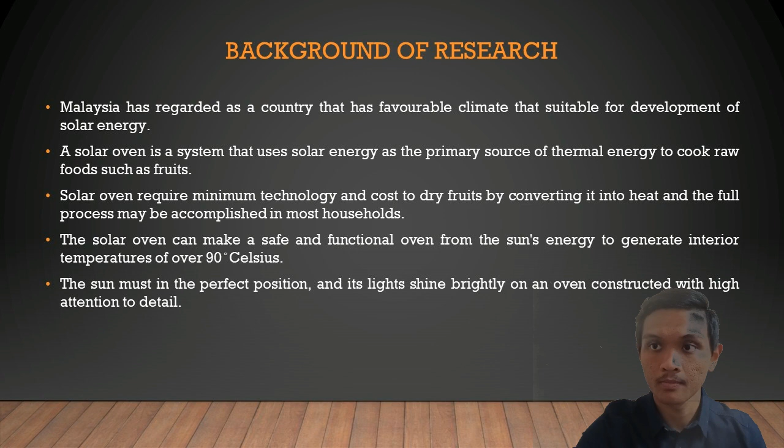This can prevent the problem, and it may also improve the position of farmers today by replacing coal, other fuels, and electricity with solar energy.

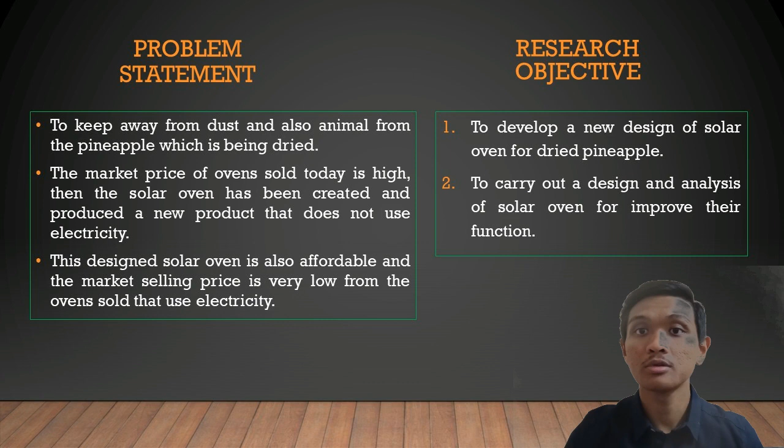The objectives: first, to develop a new design of solar oven for dried pineapple. Second, to carry out a design and analysis of the solar oven to improve its function.

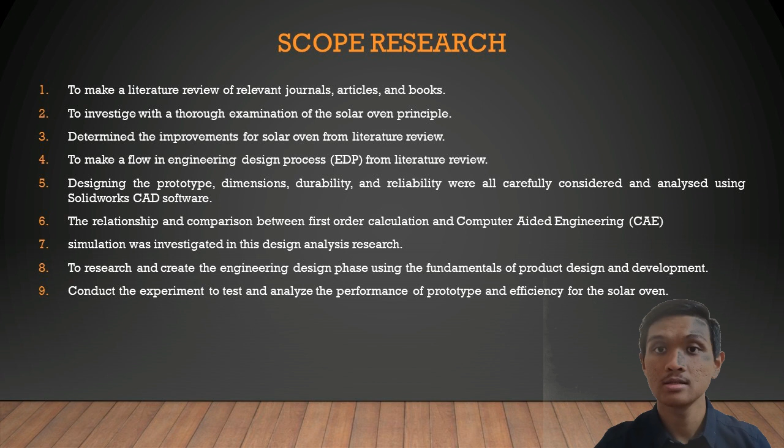To research and create the engineering design phase using the fundamentals of product design and development, and lastly, conduct the experiment to test and analyze the performance of the prototype and efficiency of the solar oven.

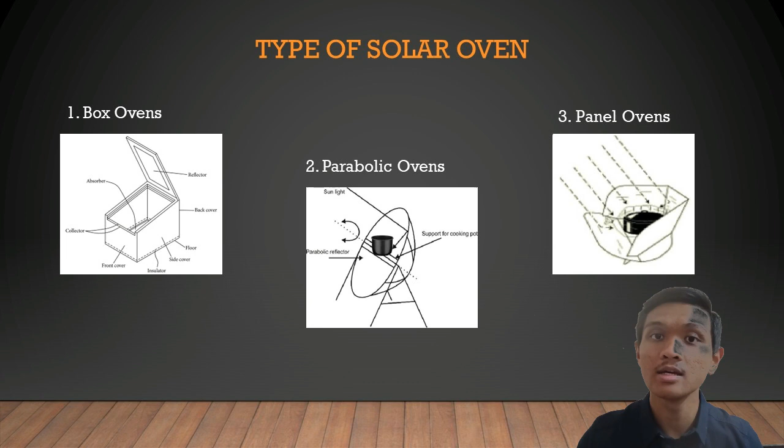According to Tom Grisham 2000, a panel oven is a combination of the box oven and the parabolic oven, using panels to receive the heat and direct it to a separate container where the food is stored inside a pot or other cooking vessel. The inner container is made of glass or plastic and serves to trap the heat inside.

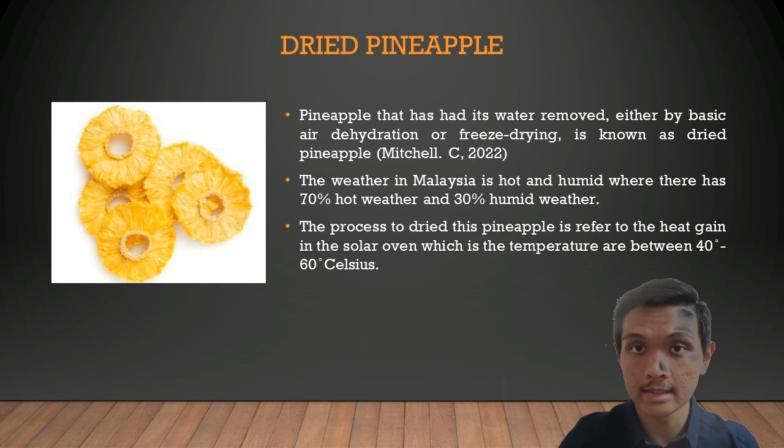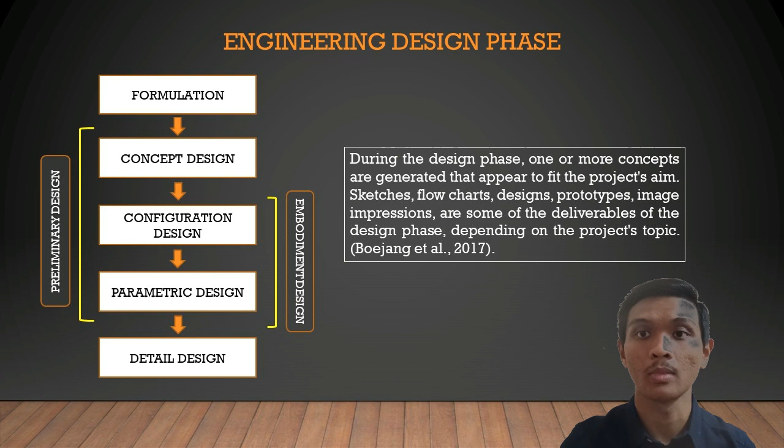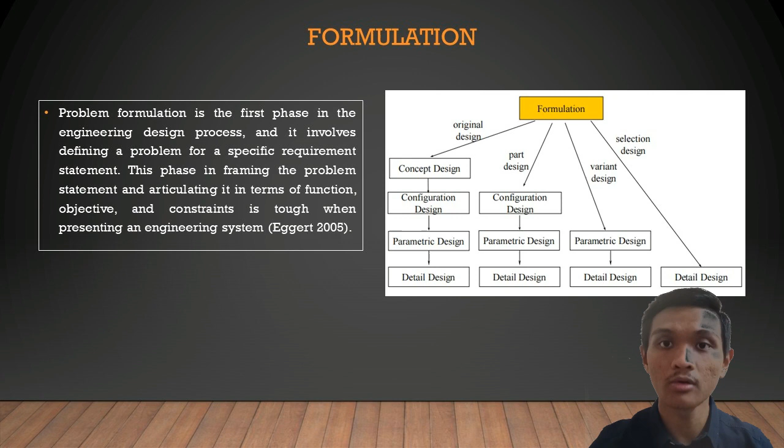Formulation: problem formulation is the first phase in the engineering design process, and it involves defining a problem for a specific requirement statement. This phase forms the problem statement and articulates it in terms of function, objective, and constraints when presenting an engineering system.

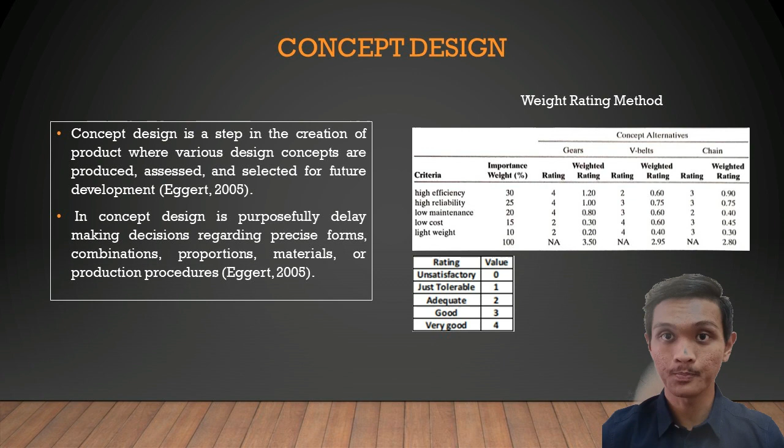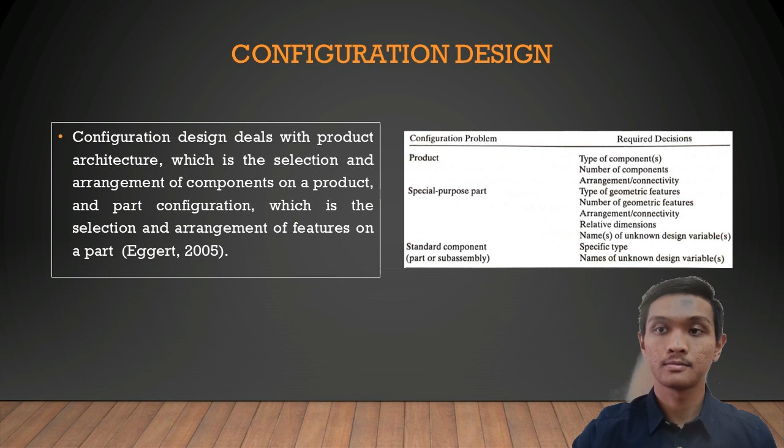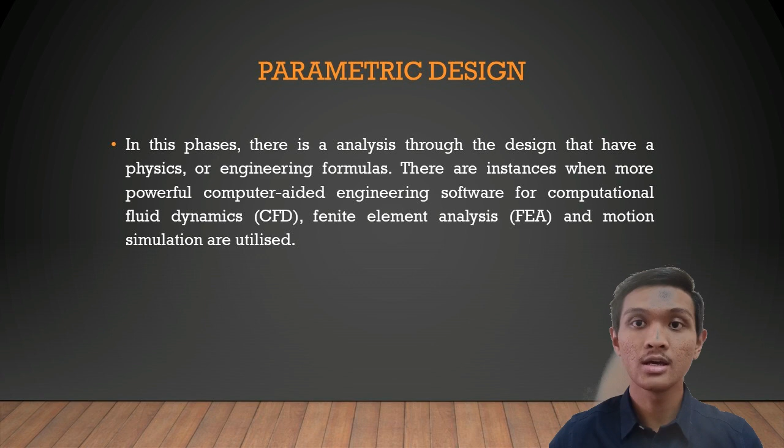Parametric design. In this phase, there is an analysis through the design using physics or engineering formulas. There are instances where more powerful computer-aided engineering software for computational fluid dynamics (CFD), finite element analysis (FEA), and motion simulation are utilized. Lastly, detailed design.

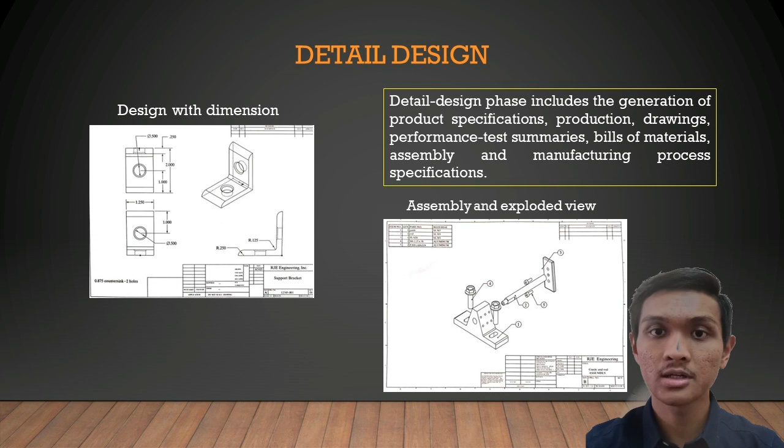Detailed design phase includes the generation of product specifications, production drawings, performance-test summaries, bills of materials, assembly, and manufacturing process specifications. There is an example for detailed design drawing and dimensions, and also assembly and exploded view for detailed design.

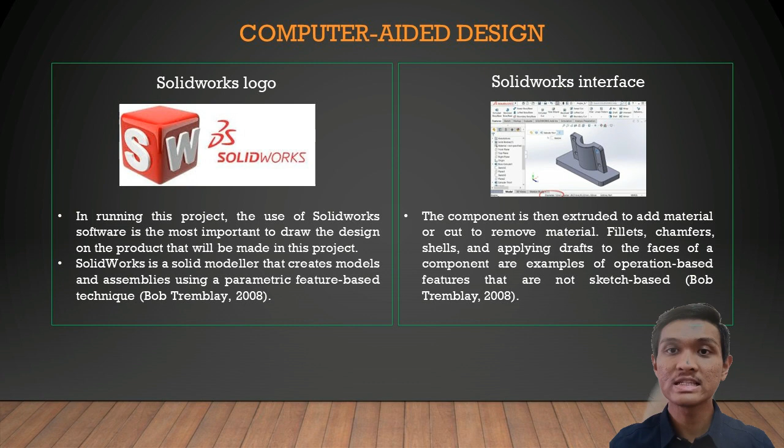Computer-aided design, CAD. In this literature review, there are many types of software that create models and assemblies using parametric features, such as CATIA, AutoCAD, SolidWorks, and others. For this project, I used SolidWorks for designing the detailed drawing. There is an example of the SolidWorks logo and their interface.

Computer-aided engineering, CAE. According to Boejang et al. 2017, simulation analysis types used most frequently in CAE include finite element analysis, computational fluid dynamic analysis, thermal analysis, multi-body dynamic analysis, and optimization. In CAE, there is stress, vibration, thermal and heat transfer analysis, dynamic analysis, internal and external flow analysis, fatigue, fracture, and failure analysis.

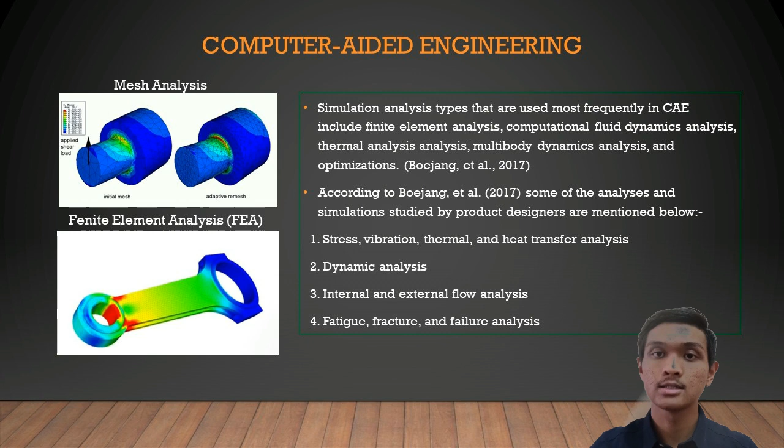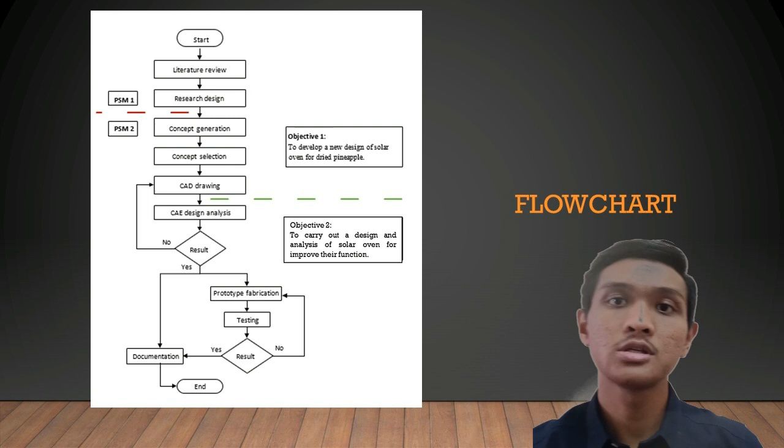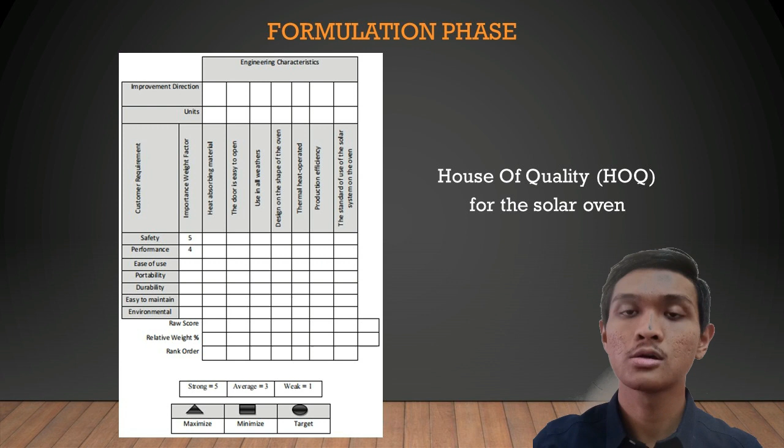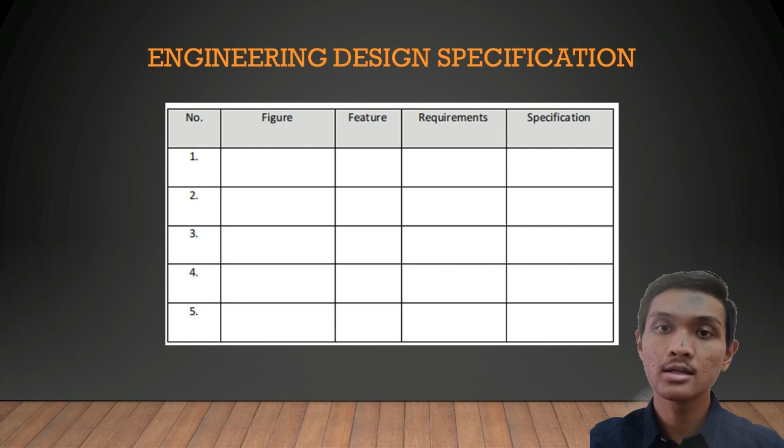Make and buy list. In this formulation and configuration design phase, I constructed a make or buy list to make sure that the detail and total parts for my project can be referred to carefully.

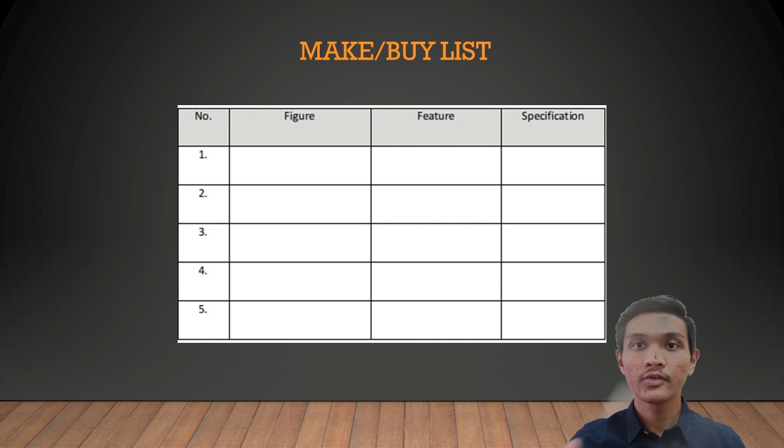Concept generation. The most important phase in the engineering design process is concept generation, generating ideas. My method begins with a list of customer requirements and ends with a selection of product options from which a final design is chosen.

There is a table for combination of concepts, with a total of 27 combinations.

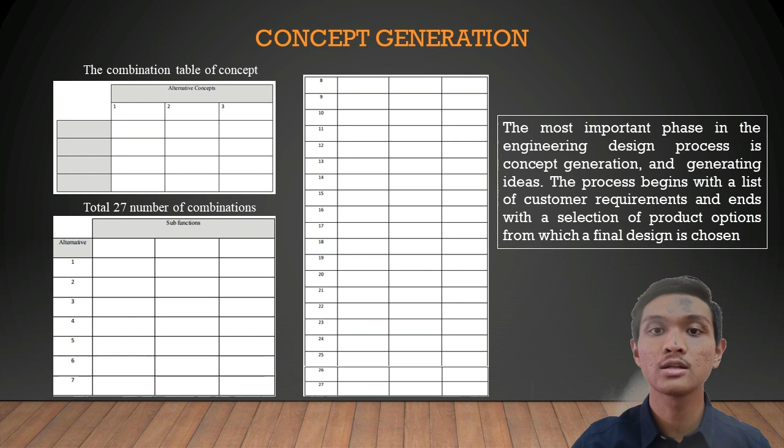Concept selection. In concept selection, I use a weighted rating evaluation method. This method is a prioritized methodology for determining which features and activities to demonstrate on a product overview.

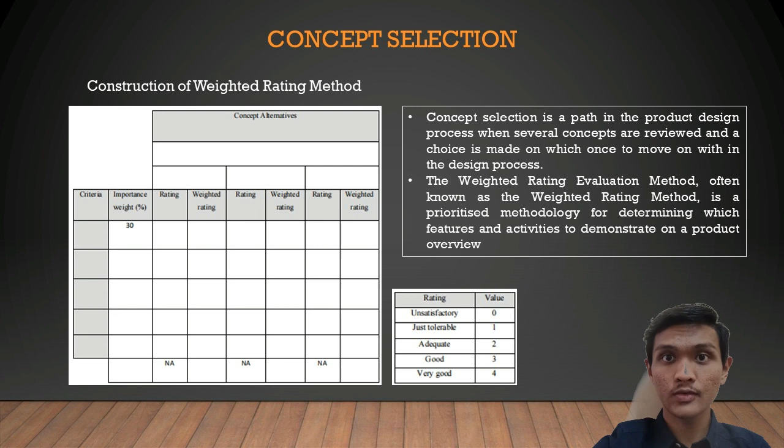SolidWorks software. For the configuration design phase, I use SolidWorks for drawing the detailed design in 3D, starting from part by part until the assembly. There is an example of the SolidWorks logo, the interface, 3D design, exploded view, and also a bill of material.

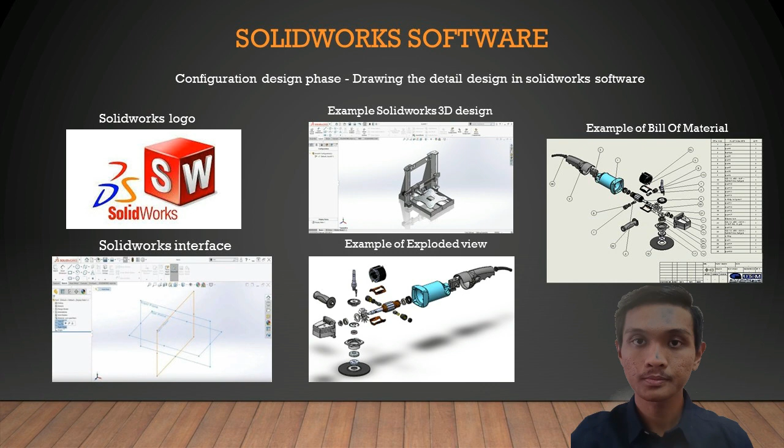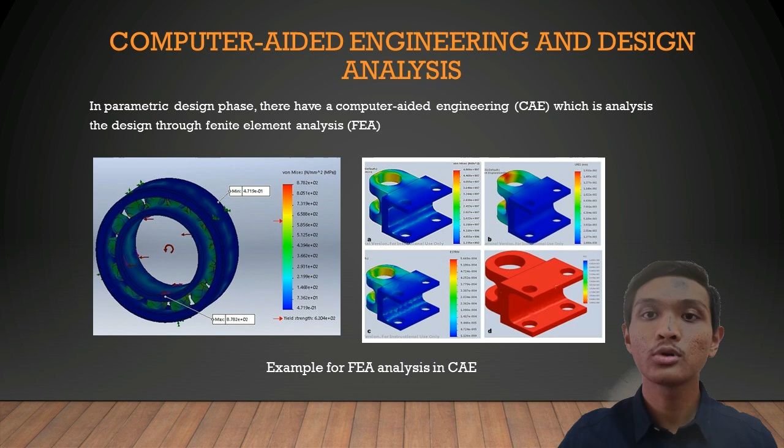Computer-aided engineering, CAE. In the parametric design phase, I use computer-aided engineering with analysis through the design using finite element analysis (FEA). This analysis can analyze the von Mises displacement, stress, and strain. This analysis will make sure that the product is perfect enough to go forward in the process.

This solar oven will make sure that the heat from the sun can absorb hot temperature in drying the pineapple.

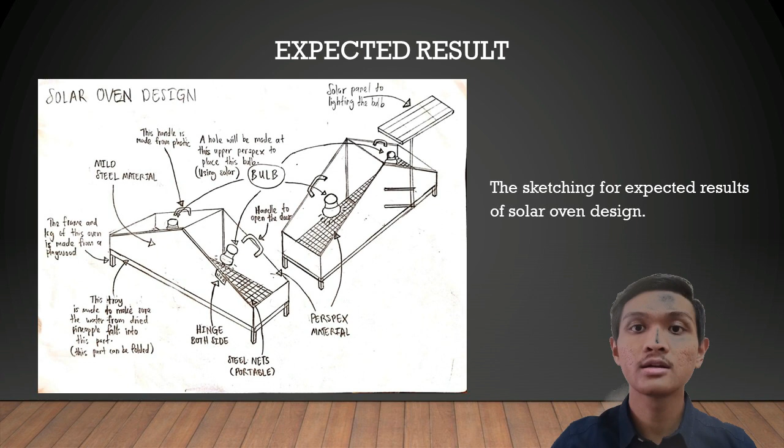Gantt chart. This is my Gantt chart for PSM1, including week 1 until week 16, and 10 tasks inside this chart have been explained.

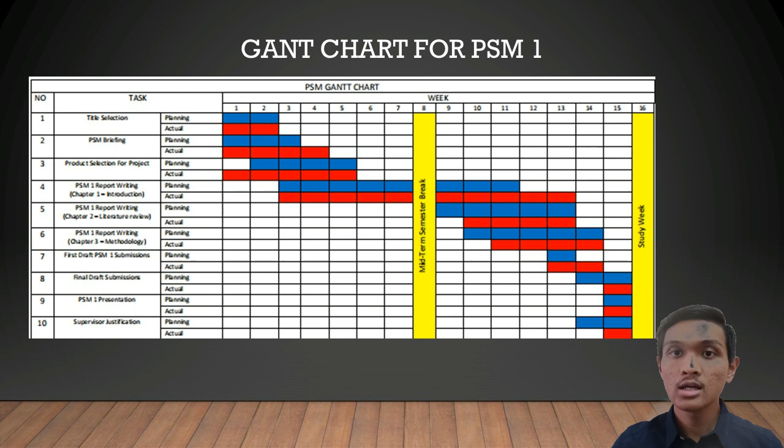Lastly, conclusions. This PSM1 explains and discusses the technique behind the project's solar oven. Before beginning the experiment, research and literature review were conducted to identify what is needed for this project and to develop a project strategy.

Chapter 4 and 5 will cover the data manipulation, prototype fabrication, and measurement at PSM2 for the next semester. Thank you.